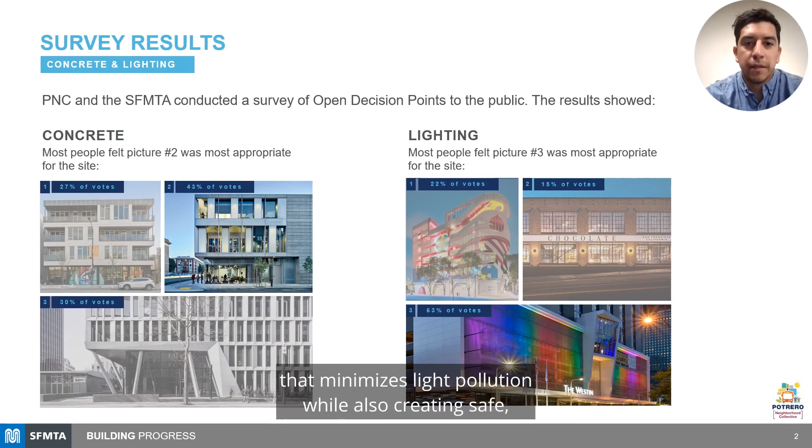Additionally, when provided with lighting samples, most people preferred option 3, which minimizes light pollution while also creating safe, well-lit sidewalks with lights that can be adjusted to playful hues.

The survey also asked people to consider their preferred approach to glass. Option 3 was the community favorite, with large panels of glass. Lastly, three different variations of metal screens were included in the community survey. Most people chose option 3 as the most appropriate style of metal screening for Potrero Yard.

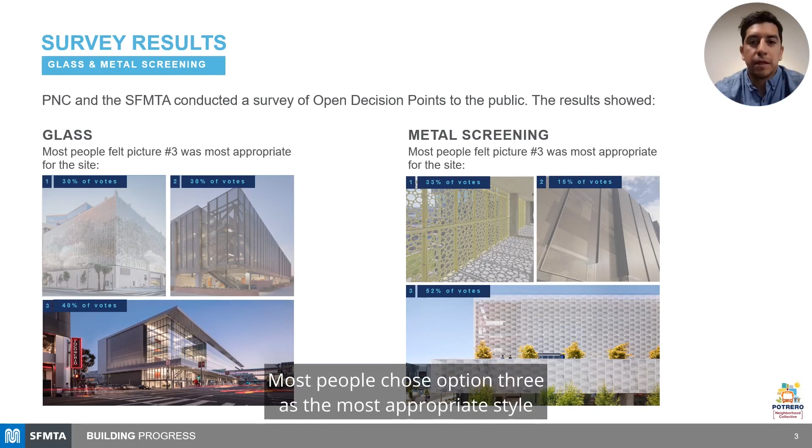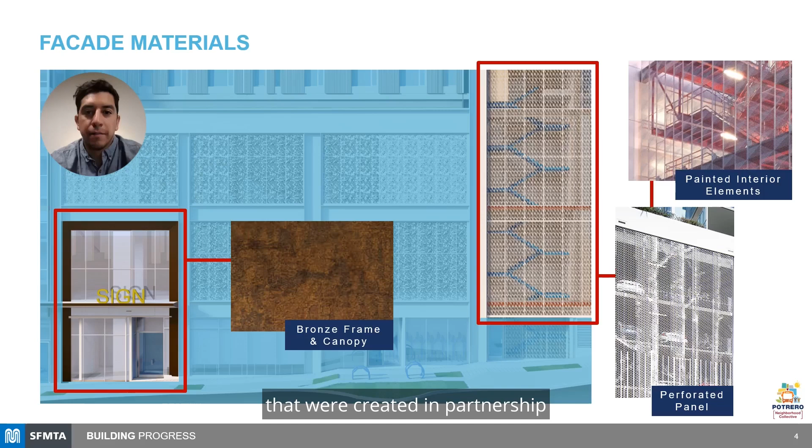The selected facade materials reflect the results of community feedback from our survey, as well as design guidelines created in partnership with the Potrero Yard Neighborhood Working Group. The design guidelines emphasize use of industrial materials and can be seen in the project design with bronze framing, perforated metal paneling, and painted interior elements.

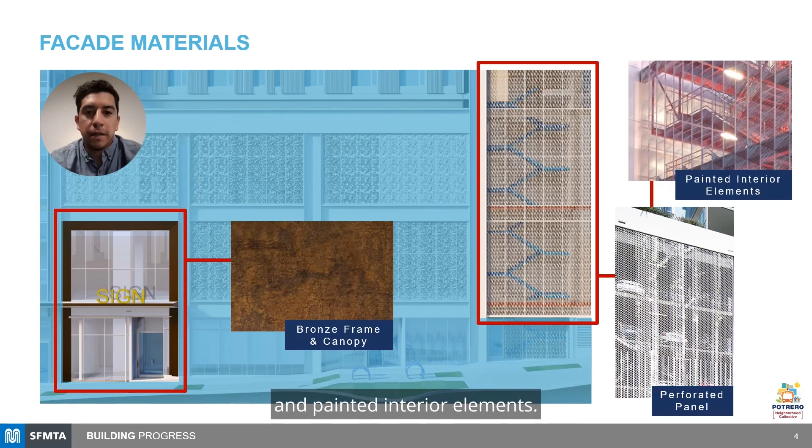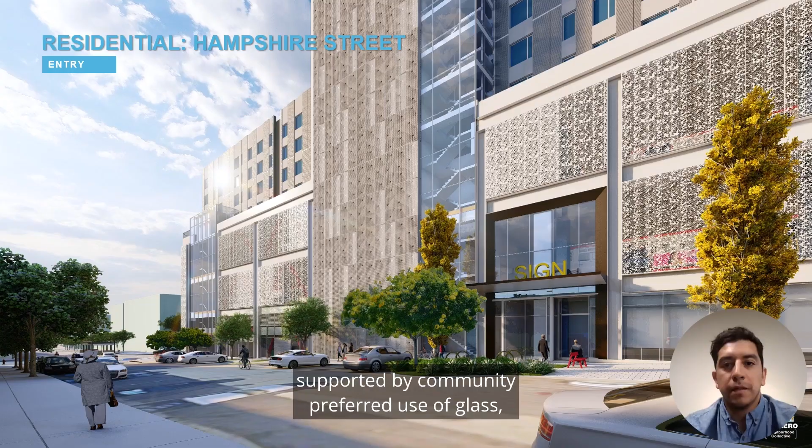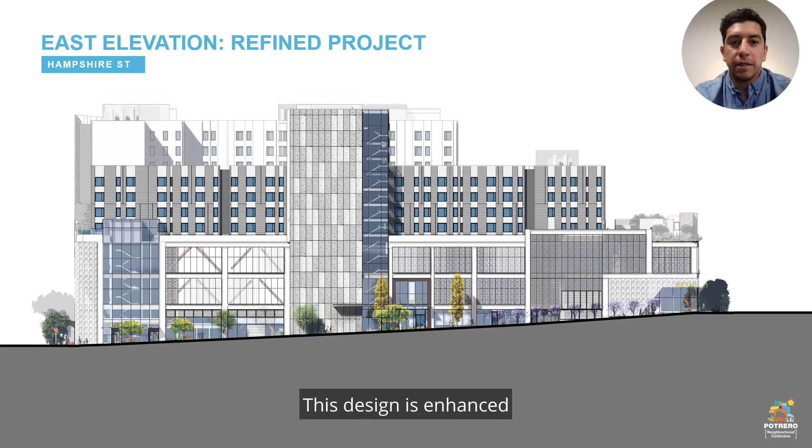This mid-block rendering of the Hampshire Street housing entrance displays a unique mix of industrial materials supported by community-preferred use of glass, concrete, and metal screening. A grid system of windows and paneling is visible throughout the Hampshire Street block, integrating the podium-level housing with the bus yard below. This design is enhanced by carefully placed trees and landscaping.

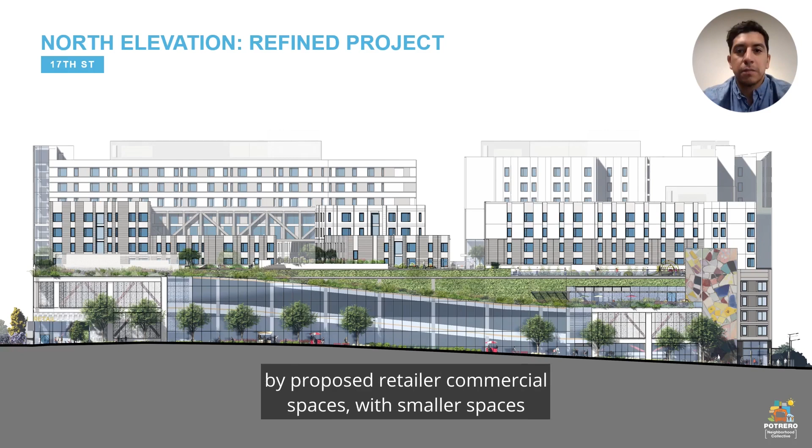Additionally, both corners of the block are anchored by proposed retail or commercial spaces, with smaller spaces for street vendors throughout 17th Street. 17th Street is activated by this combination of uses and supported by a mix of vibrant public art near Bryant Street, a variety of industrial building materials, and fresh green spaces.

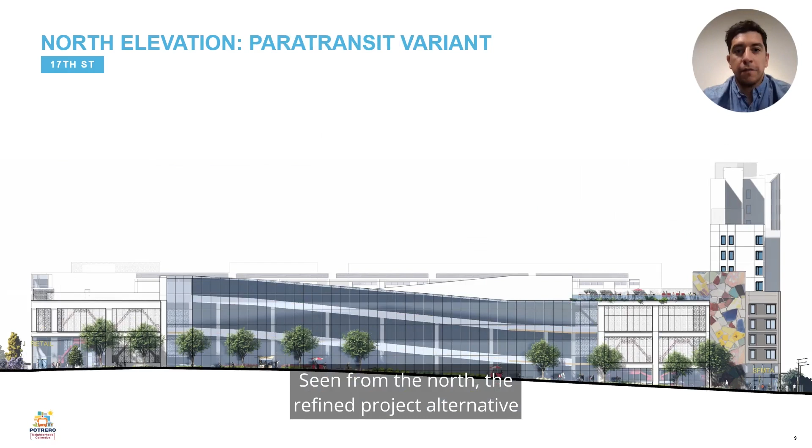Seen from the north, the refined project alternative maintains the proposed glass wall on 17th Street, allowing for public visibility of Muni operations. Additionally, in the paratransit variant, 17th Street is still activated by a mix of vibrant public art near Bryant Street, a variety of industrial building materials, and fresh green space.

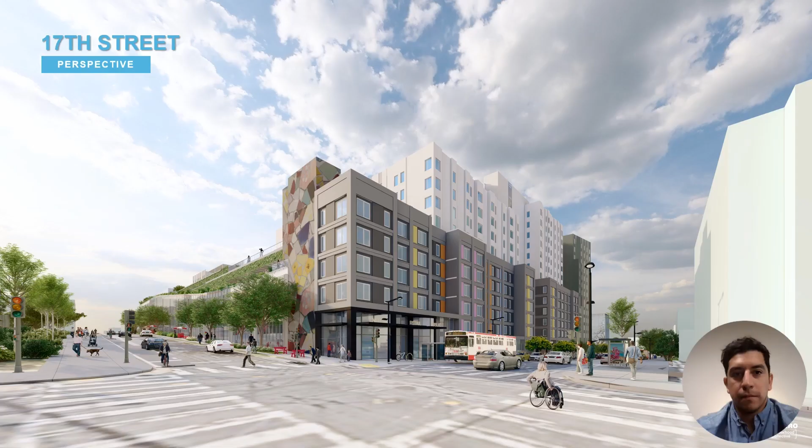At the corner of 17th and Bryant Streets, the mix of both building materials and colors is evident, with a mosaic art opportunity facing Franklin Square and a range of colorful insets along the Bryant Street housing. This mix of color and materials supports street activation while also integrating both the industrial feel of the immediate neighborhood and the colorful nature of the Mission District.

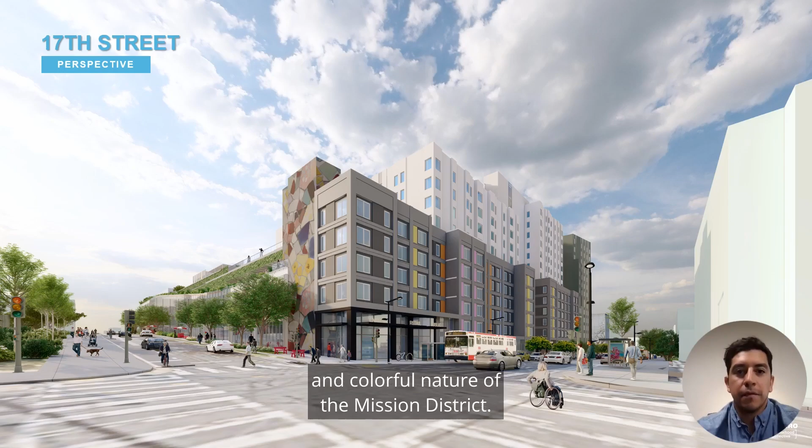Both the refined project and its paratransit variant are proposed to have the same design as the proposed housing and retail on Bryant Street, and are not impacted by the paratransit programming.

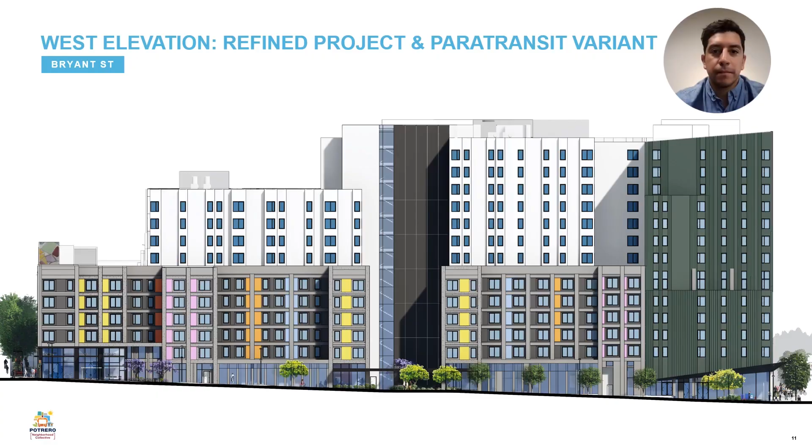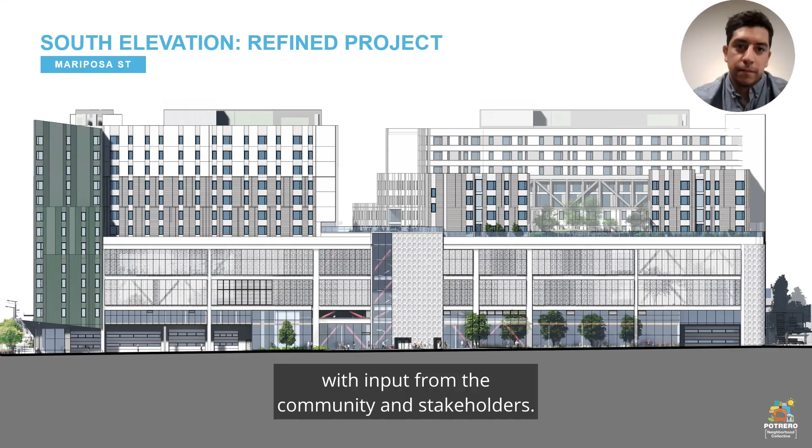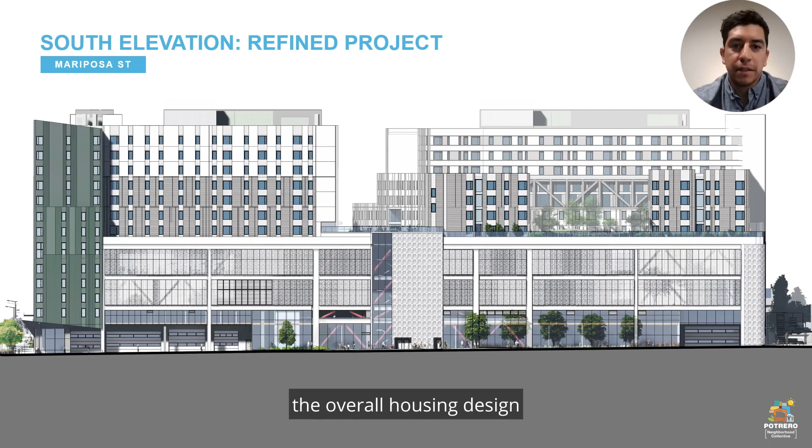Along Mariposa Street, the bus yard is visible with industrial notes such as roll-up doors for the bus entrance and exit, and visible support beams. Again, the grid system on the podium level housing and Bryant Street housing integrates the overall housing design with the functional design of the bus yard.

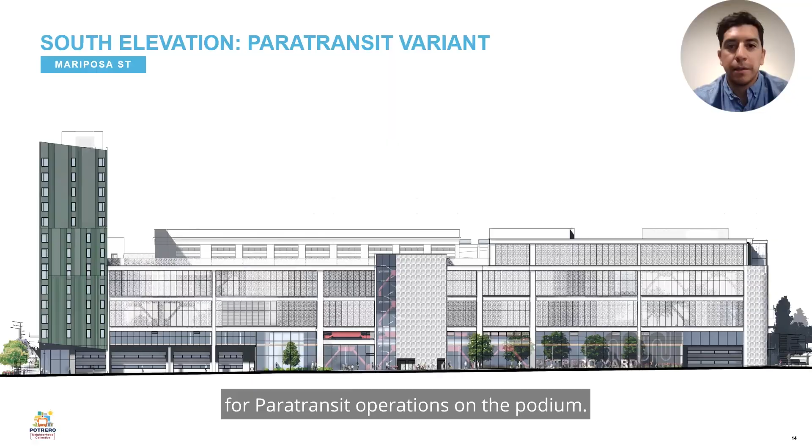The Potrero Yard Modernization Project proposal is augmented by PNC's dedication to partnering with the city to maximize local business enterprise participation, as well as job and career opportunities for SF residents. Additionally, as a developer team with strong roots in the Southeast Corridor communities, PNC has joined the city's public engagement team to conduct broad community engagement that informs, educates, and collaborates with neighbors on project development.

PNC and the city developed a draft LBE plan for the bus yard infrastructure, which will be monitored by SFMTA's Contract Compliance Office. The draft LBE plan was published on January 12, 2024, and made available to accept public comments through January 29, 2024. Key elements of the draft LBE plan include targeting outreach to LBEs classified as micro-LBEs and based in the project area or other disadvantaged communities throughout the city.

Identifying a lead developer LBE liaison that supports LBE participation. Developing an LBE trucking program that prioritizes San Francisco-based trucking firms. And creating an appropriate reporting protocol for team accountability and transparency.

A separate LBE plan will be created for the housing and commercial component and will be monitored by the city's contract monitoring division. Additionally, the general contractor ultimately selected to build the bus yard will be expected to adhere to the city's local hire policy for construction, SFMTA's employment training program, and the city's first source hiring program.